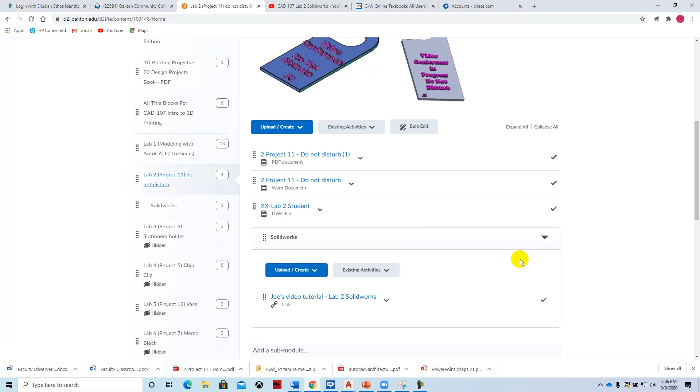And essentially this week we're going to focus on CAD, and so we'll be doing the CAD applications, and then in future labs we'll start going through slicing and printing. So you can find this lab under Contents, and then we'll go to Lab 2. If we want to look at the document, we can download that.

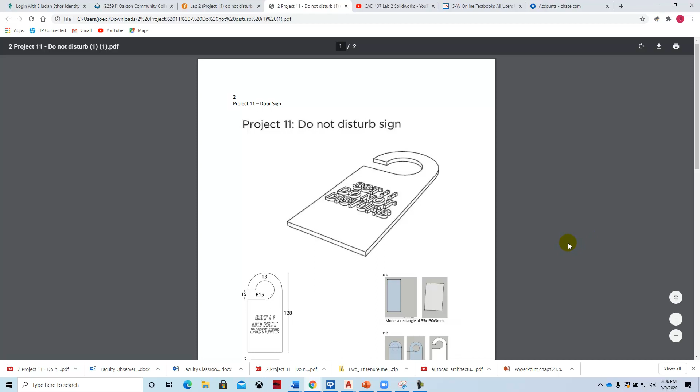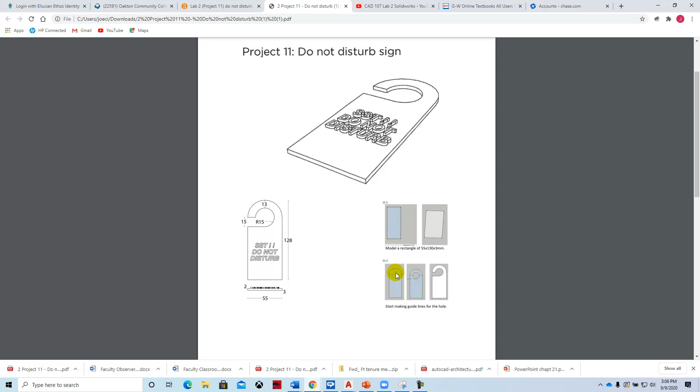And so it's basically this Do Not Disturb sign, and the way that we're going to run this class is there are going to be a lot of different CAD-based exercises. And so the way the instructions are written, you can use just about any software, but ideally it's a metric drawing. It's 128 millimeters by 55 millimeters. And we'll draw this base. We'll create the geometry for the handle. And then we'll put text on that and extrude that. So let's get started.

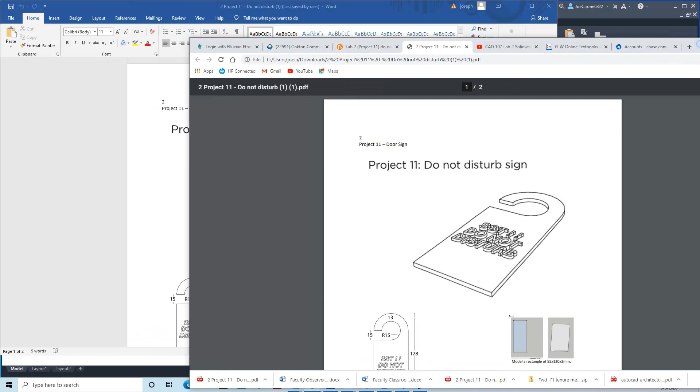Switching back over to D2L, we have a student file, and so we're going to download that, and then we're going to open it. And on the student file, we've given you what you need to make this work, and I'm going to go through and show you how we did that.

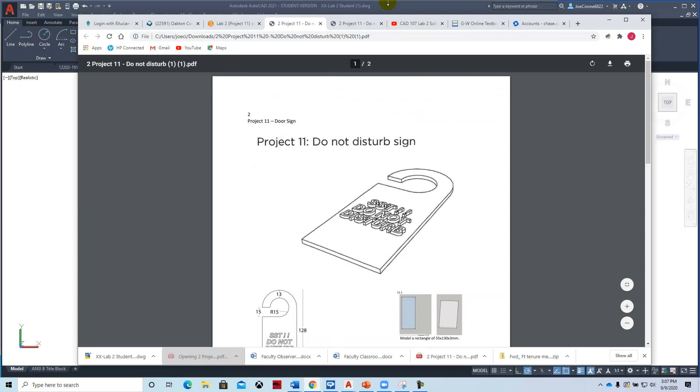And so essentially I'm going to switch over here to layer number object, and I'm going to select the line command, and then at some convenient location I'm just going to go here right next to it. I'm going to click the starting point, and then I'm going to drive that up, and I'm going to need to get my instructions. I'm going to drive that up 128 millimeters.

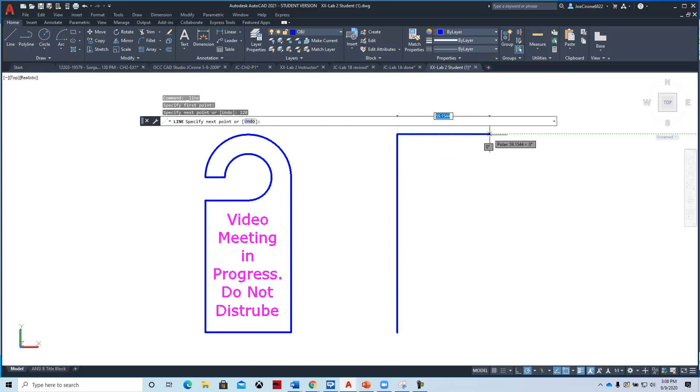You'll notice that it tracks with these green lines, and that's caused by this button right here called Polar. So we'll track that up. We'll type in 128, track it to the side, and I'm going to increase this to 56 millimeters. Geometrically it just works better. It's a little bit off the way the instructions are written in the book. Point down 128, and then I'll go back to the origin, hit escape.

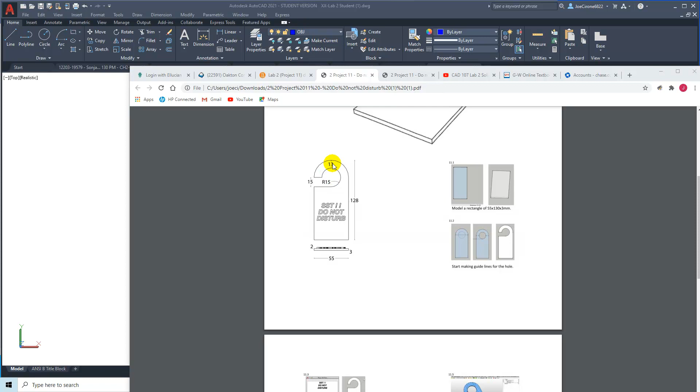We can see that the circular geometry is located 15 plus 13, or actually, so we're going to have a 15 millimeter radial circle here, and then outside of that we're going to have 13 millimeters. So if we were to draw a circle, so we're going to offset this top line 13 millimeters, and then we're going to offset that line 15 millimeters to find the center.

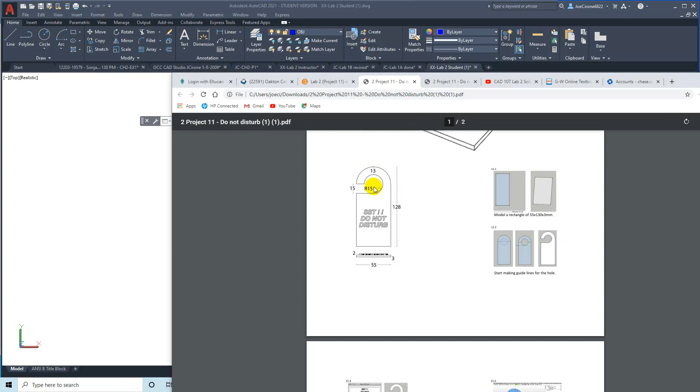So we'll go to the offset command, or you can just type in offset 13. Select the line and then the side, and then we're going to go back to offset, and we're going to type in 15. Select this line and this side, hit escape, and then we'll draw a circle, center radius, from this midpoint. And the midpoints are set up with this object snap.

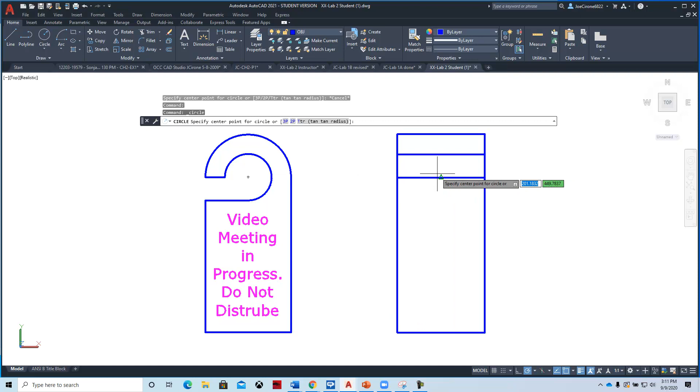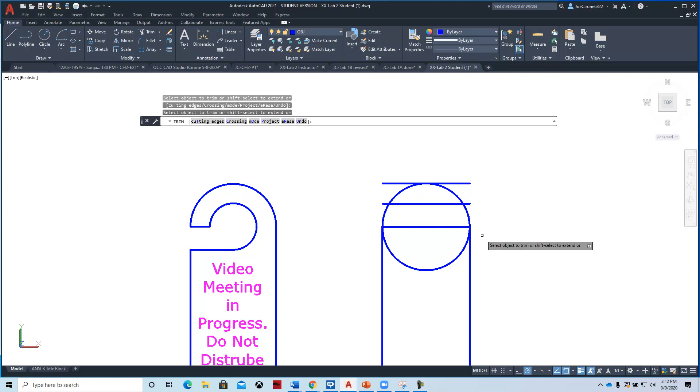It's set for midpoint. And so when we draw a circle from that midpoint and bring that out, we're going to see that it goes 28 millimeters, which will give us this top of the arc. And then what we'll do is we'll use trim. So we'll say trim, enter, and then we'll trim these lines back. We can erase these other two lines.

And then we can put a 15 millimeter radius in the center. So we'll just wake up that center, and then we'll bring this out, type in 15. We can draw a line from this quadrant straight across, hit escape, and then we can offset that line 15 millimeters. It's already in the default, so we can just hit enter.

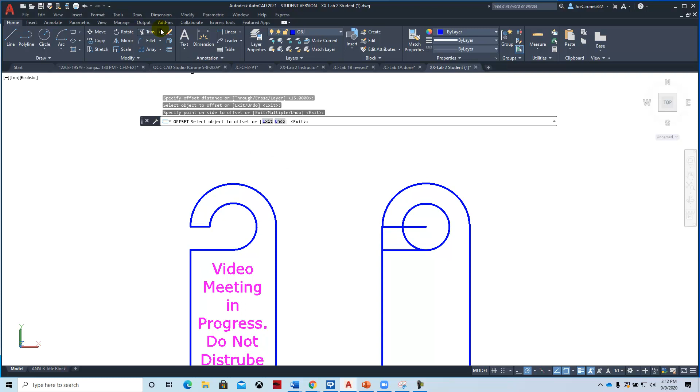And then we go back to our trim command. Trim, enter, trim this, and that. So that creates the geometry for this part. And what we want to do is we want to make these lines into a complete shape. And I like to use polyedit and join. You can also use the region command.

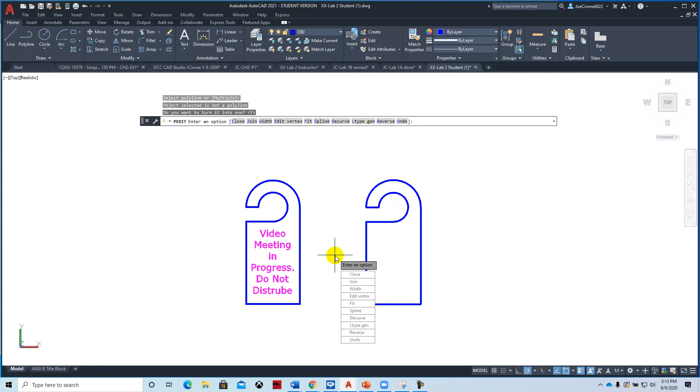I'm going to type in pedit. I'm going to select one of these lines. It'll ask me if I want to turn it into one. I'll say yes, and then I'll say join, put a box around it, hit enter. It'll tell me that it's found 6 segments. And if I hit enter again, hover over it, you can see now that it's one shape. And that's essential when we start to model things with AutoCAD, that you have a boundary shape.

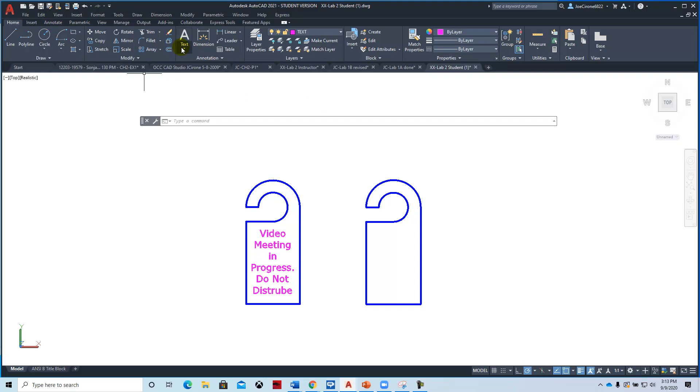Otherwise, it'll create surfaces. We're going to switch over to the text layer, and then we're going to go and create some text. So we'll go over to the text button, and we'll go with multi-line text. And then you just need to put a box in here.

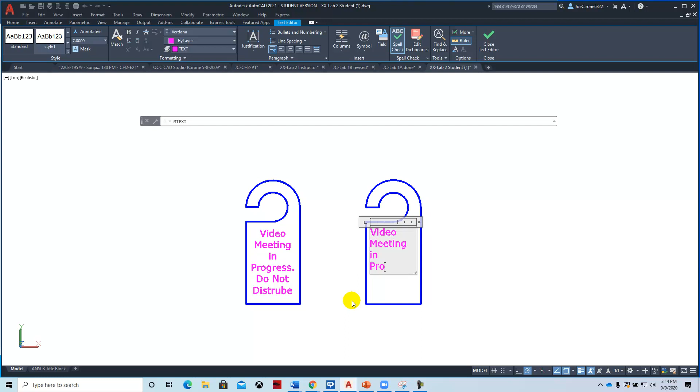And then you can type in what you like. I'm just going to stick with what I have. Video meeting in progress. Do not disturb. We'll spell it correctly this time. We'll highlight this and we'll center it. And then we'll click the green check mark.

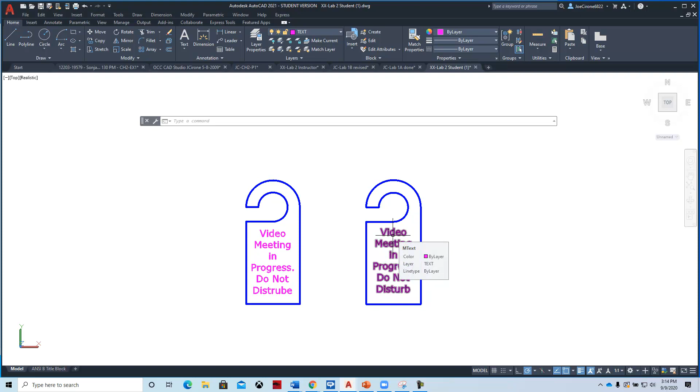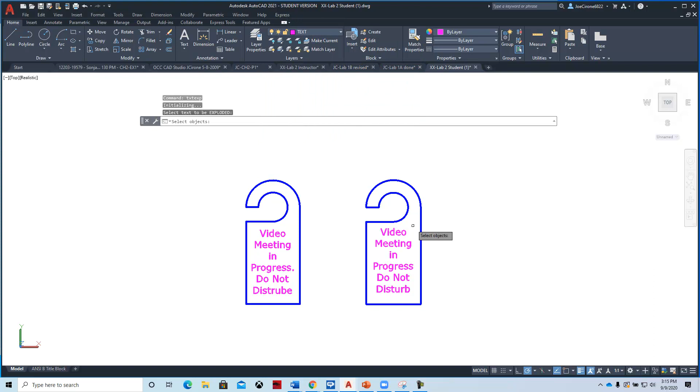And the reason that I did the exercise this way was because in order to turn the letters into CAD geometry for extrusion, you have to be in the top view like this. And then turn this into the CAD geometry. I like to use these menus, hide menu, show menu, and then I go to the express tools, text, and then we're going to explode the text. And so to explode the text, you just put a box around it and hit enter. And then you'll notice that the text now looks more like letters.

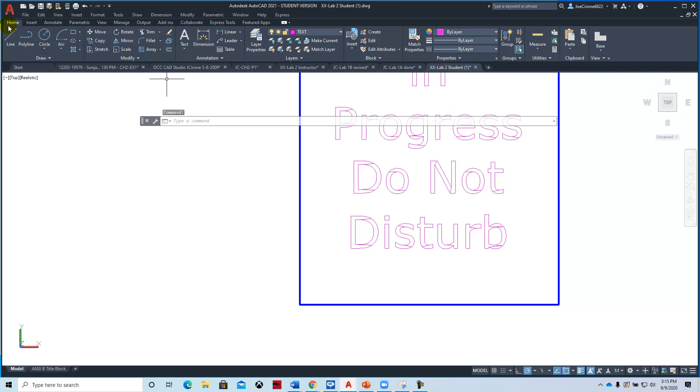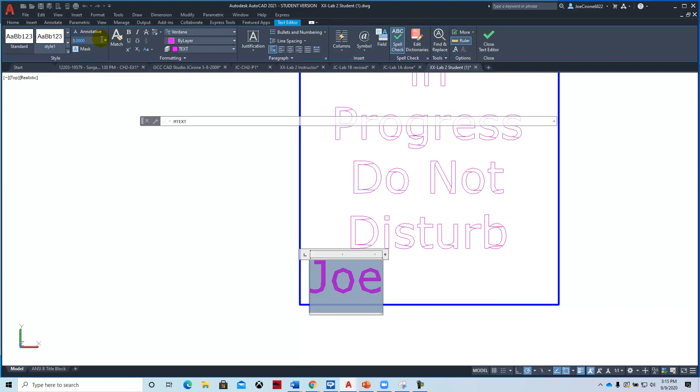Okay, next thing that we're going to do is to change the perspective for that. And let's do one more thing. You can put a logo or another piece of text on here. And so what I'm going to do is I'm going to go back and I'm going to put in one more piece of text. And I'm going to take that text and I'm going to change the size of that to something smaller, maybe 3 millimeters. And green check mark that. And I'm going to move this down just a little bit.

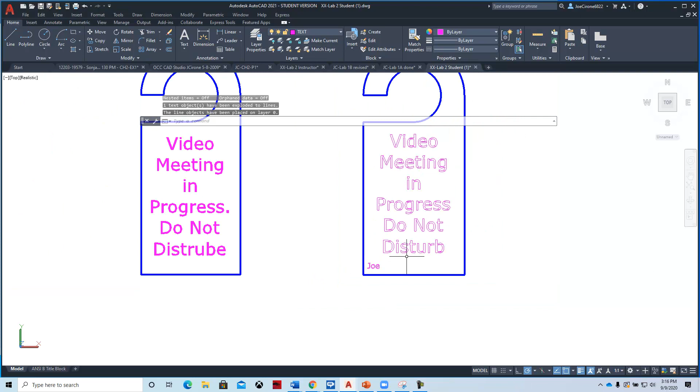And then I'm going to use that express tool again because I want to know whose this is. And so I'll go back to text, explode text, click on it, and now we can work with this in 3D. To do that, we'll click on this view. We'll change it from top to southeast isometric. And then I'm just panning and pushing the middle wheel, turning the wheel on the mouse. I'm going to switch over to the blue layer, which is our object layer. Actually, I'm going to leave it on the text layer. We'll do the text first.

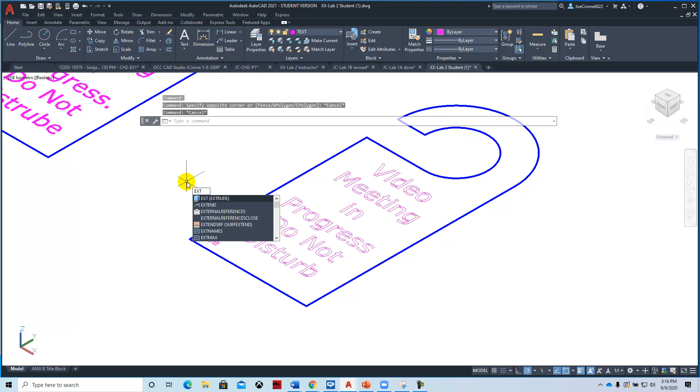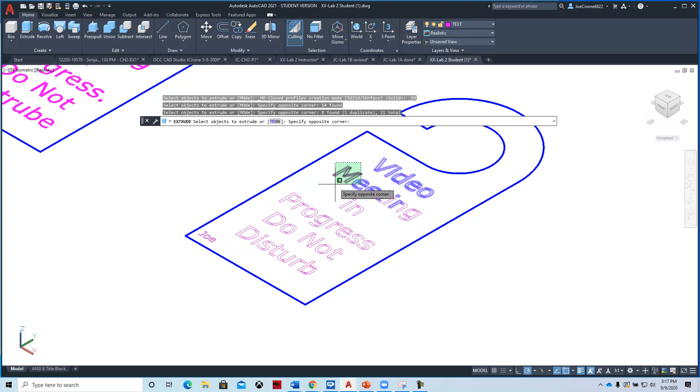And then we're going to extrude this. Now you can just type in extrude, or we can change over to the modeling menu. And I'm going to change over. To change over the interface, you click on this little gear and you change it to 3D Basics. And then I'm going to go to Extrude and I'm going to select the text. And as long as you get these green boxes that touch all the letters, you're in good shape.

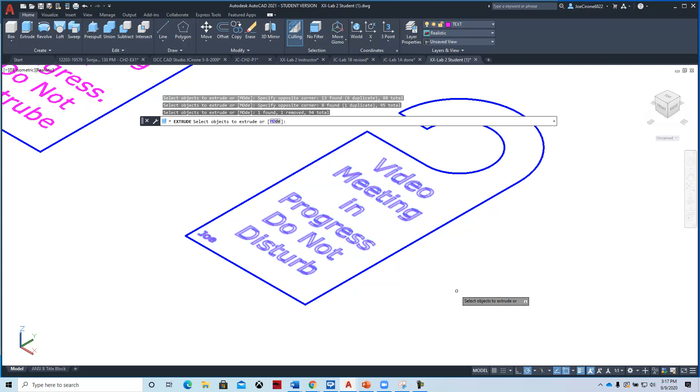And there's a few different ways to do selection sets. If you accidentally get the blue one like that, you can hold the Shift key and click on it to remove it, and it'll tell you one removed. So you want all the purple text and not the blue to be selected, and then you'll hit enter. And then we'll push this up, and we're going to go up 2 millimeters. So we'll say 2, enter.

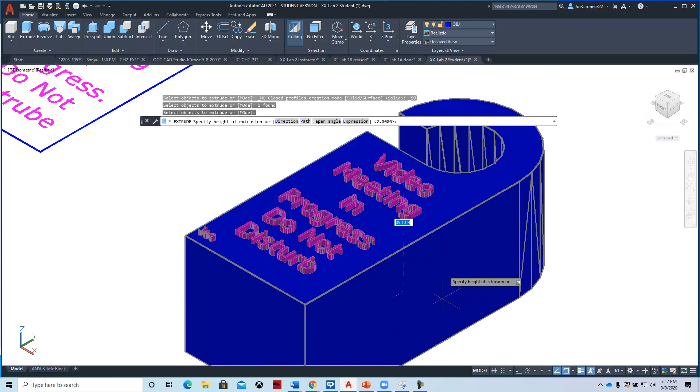Now we'll do the same thing for the base of this. I'm going to switch over to the blue object layer, and I'm going to say extrude. I'm going to select the blue line, hit enter, and then I'm going to push it down in the other direction, and I'm going to type in 3 for 3 millimeters. I'll hit escape.

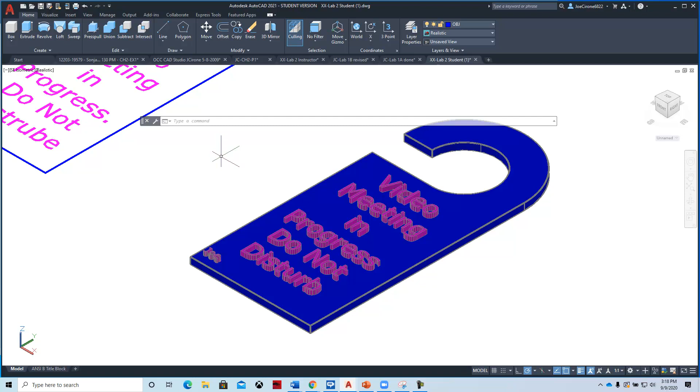And then I'm going to union this, because right now all of these letters and little pieces are separate, and so before we go into 3D printing it, we're going to do what's called a Boolean operation by unioning these together. And so here's our union, and we're just going to put a box around all of these and hit enter. You know it's a good command because it takes up some processing power.

And then we're going to save this file for 3D printing. And so we're going to come back here. I'm going to say save as. And then I'm going to have everybody use their initials. And I'm going to save that in my CAD 107 directory as Lab 2.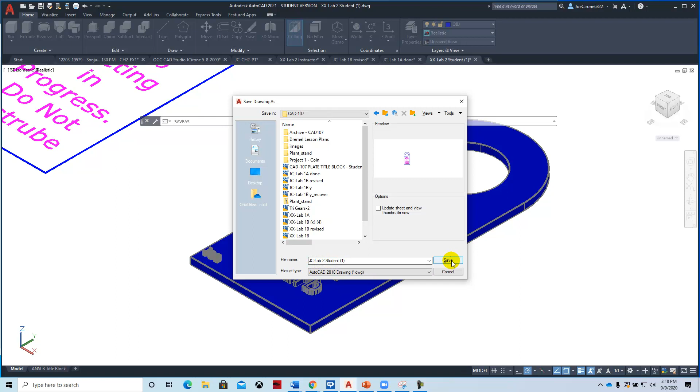And then I'm also going to export that. And so I'm going to go to the big red A. I'm going to say export, other file formats, and I'm going to choose lithography, and I'm going to hit save, and I'm going to select my sign, and I'll hit enter. And that will then create the file for 3D printing. Okay, that completes how to draw and model this program using AutoCAD.